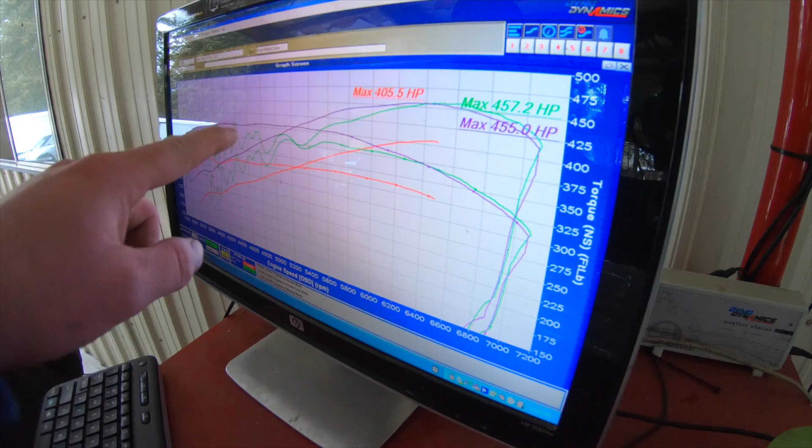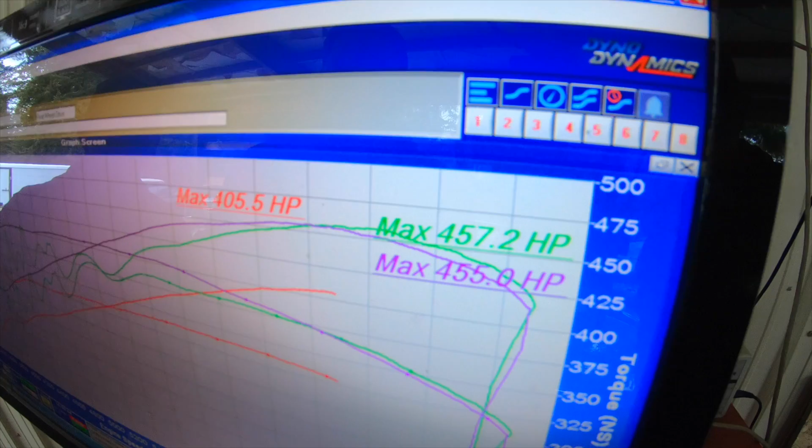I'm just gonna do a few rips. I'm gonna do a rip, clear the grass, do another one, get some temperature in the tires. And then hopefully we can get a nice clean graph just to print out, and it'll be nice and tight. Yeah, sounds good.

This thing is ripping out here. It likes the cold temperatures for sure. Hopefully you can hear me over the fan, but this thing's doing amazing in stock form. This has a K&N drop-in air filter in the stock box, and the fuse is pulled out of the dual mode exhaust. That is it. So this is bone stock.

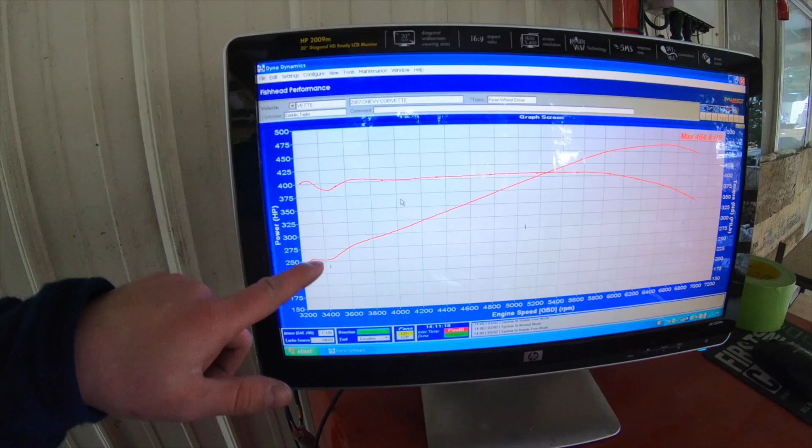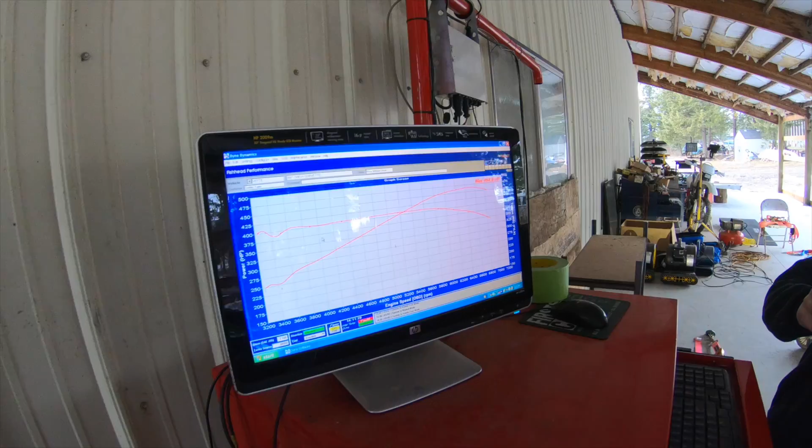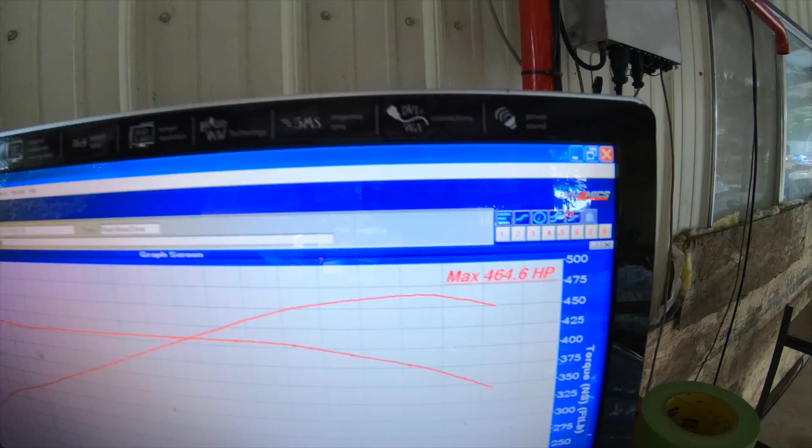Oh! Unbelievable. Look at this graph. That is a beautiful graph. 464.6. That's way higher than I thought. Loving it. I was thinking it might get low 4, somewhere in the 410 to 20 range, 464. That might be some kind of a record. That's unbelievable. Yeah, but excellent. Likes the cold air, for 28 degrees outside, it's loving it.

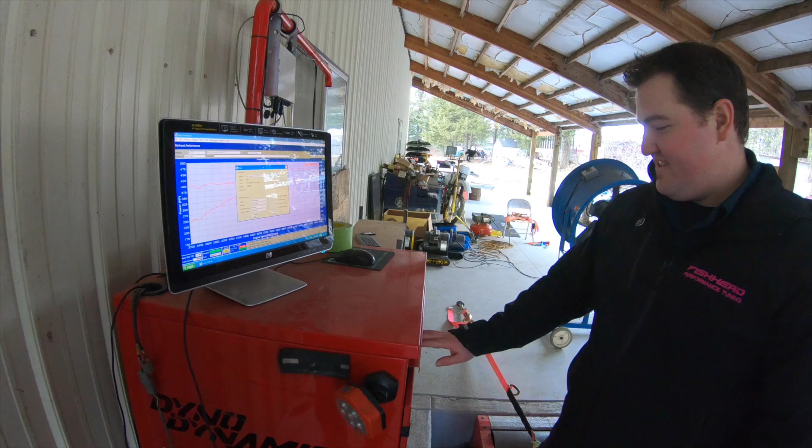Yep. Can't wait for the before and after you do some mods. I think it, well, it depends if I put a blower on it or not. Heads cam should net 120 to 50 horse, I think. Yeah. I've got long tube headers. We're taking the cats off, 3-inch off-road X pipe and stuff, so it's gonna move some air.

All right guys, we're just gonna unstrap this thing and load it back on the trailer to bring it home, but this thing performed incredibly well. Super happy with it. We're loaded up, gonna head back to town. Isaac's just pulling the stock tune off the car just to save that in his records, because we will bring this back to the dyno and fine-tune it and get some more figures after it gets the heads cam and maybe the supercharger. We're going to talk a little bit more in the end of the video here about my plans with the car now, and maybe you guys can give me some feedback as well, so I'll see you soon.

We're back in the home garage now. I got the car put away, and I rewatched some of that video from just a minute ago, and the car just did awesome. I'm so impressed with this thing in stock form. These cars really are a force to be reckoned with. But anyways, I'm looking forward to doing the upgrades to it here within the next couple of months.

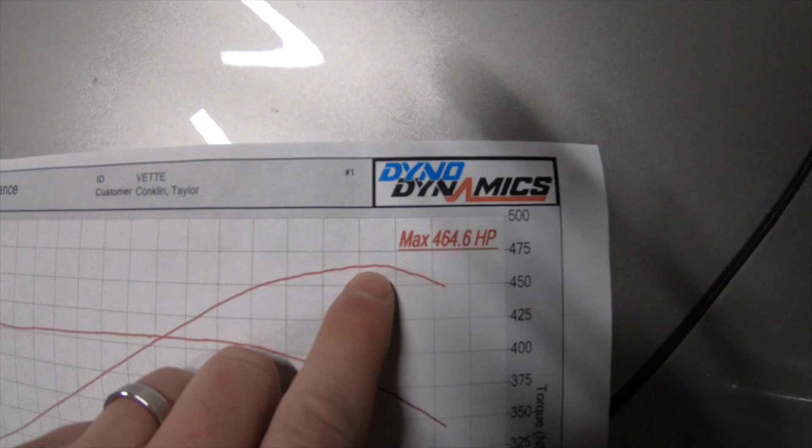And I wanted to show you guys the printout of the dyno sheet here. So looking closely at it, you can see our max power of 464.6. That happened right around 6,500 RPM. If you follow this curve up, I'm gonna call that 465 horse.

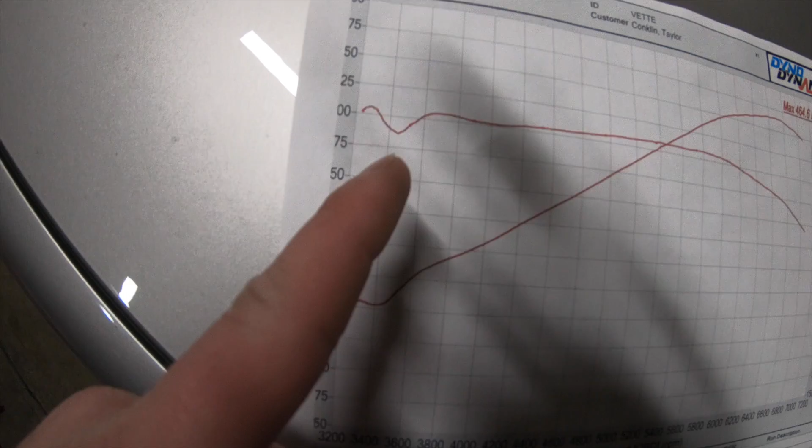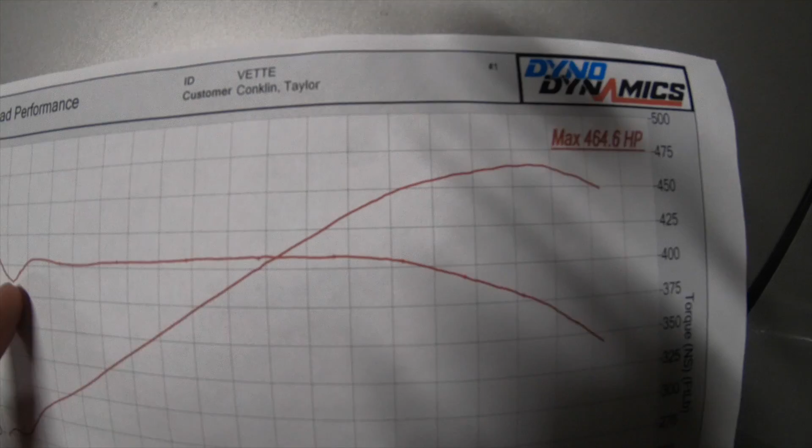But what's really impressive is the torque. Come over here, we basically started the pull. Don't mind this little squeak at the front here. We started the pull right at basically 3,500 RPM. From 3,600 all the way to 6,000 RPM, we are above 400 pound-feet with a max at 5,200 of probably about 415 pound-feet.

So, what a beautiful graph. The power just climbs unbelievably well all the way to about 65, and the torque is strong at 400 pound-feet. Essentially from 3,500 to 6,000, that's a lot of power there.

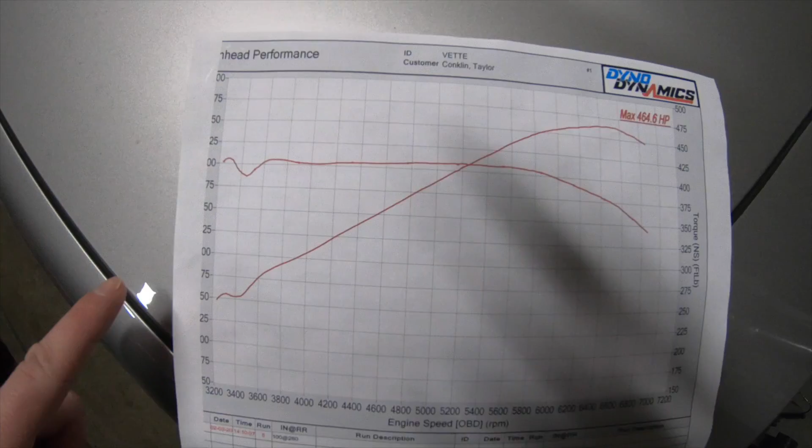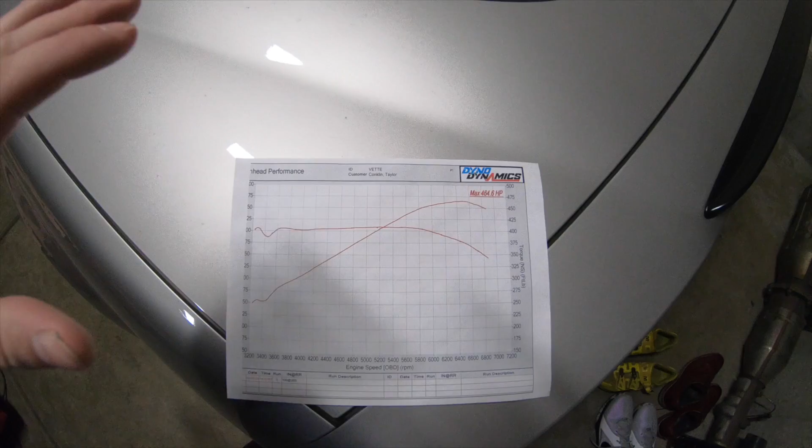So really impressive in stock form. One last thing to note, this was a 4th gear pull, this whole dyno rip. We made 465 at 6,500 RPM. This was 160 miles an hour in 4th gear, making 465. That is just incredible, so that gives you a sense of how fast these cars are. There's 2 more gears left, so this is easily a 200 mile per hour car for sure, given the aerodynamics and the gearing.

Now on to a quick conversation about what I'm thinking of doing with the car, what company I've decided to go with, and mods and so on. As many of you have seen or heard of, Race Proven Motorsports, or RPM, out of Delaware, are in my eyes the C6 Z06 leaders in the aftermarket performance industry. They have a lot of race-proven cars. They actually hold the record of around 8.50 in the quarter mile with a stock bottom end LS7 427 car. So they've done a lot on this platform, and their stuff just works.